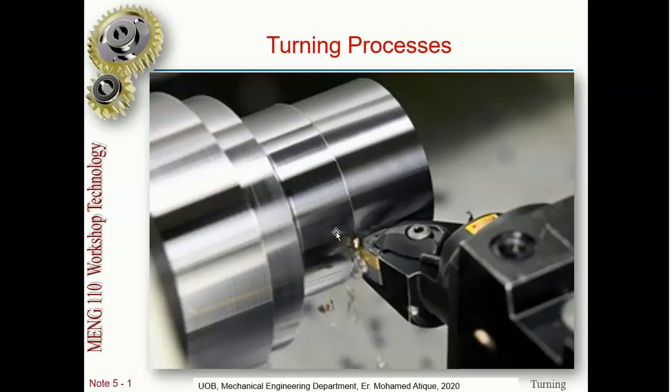Now what is turning? It is one of the basic manufacturing processes of metal cutting. It is removal of metal from the outer diameter of a rotating cylindrical workpiece, meaning we are reducing the diameter to obtain the required dimension. So turning is used to reduce the diameter up to a specified dimension, and to produce a smooth finish on the metal.

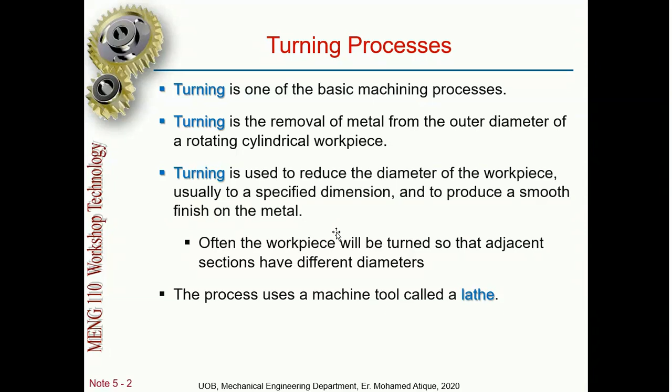Often we require different diameters, so the workpiece will be turned so that at different places we can have different diameters, and the operation is carried out on a machine called a lathe machine. This is an image of a lathe machine, also called a center lathe machine.

The main parts to be noted are: first, this is the headstock, the top of the machine. Then at the end of the machine there is the tailstock. Inside this tailstock there is a drill chuck.

Inside this tailstock we can put a chuck or dead center as per requirement. This is used to support long workpieces during the turning operation. If the workpiece is long, during turning it can buckle and we will not get proper finish. So to hold the workpiece from both sides, we use this tailstock.

Then there is the chuck, mounted on the spindle. This chuck is used to hold the workpiece. The workpiece will be held between this chuck.

Now to hold the workpiece we have the chuck, but to hold the tool we have the tool post. The tool post is used to hold the tool. So to hold the workpiece we have the chuck, and to hold the tool we have the tool post.

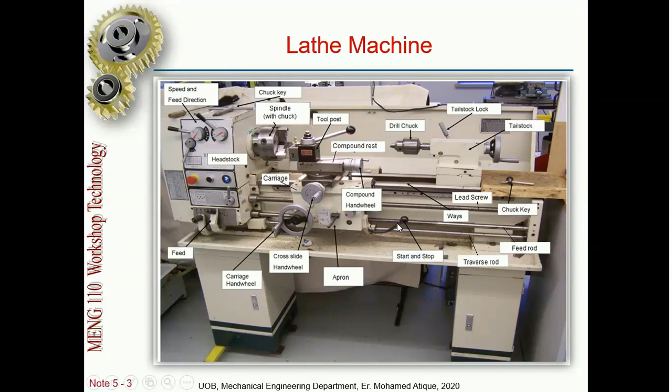So one by one we will see each component. This is the headstock, this complete part. Now H2 and H3 are the speed change mechanism; depending on the requirement, we select the speed.

This H4 is the spindle on which the chuck is mounted. It is mounted on this spindle, and also has a hole to accept a long work or bar stock. If the workpiece is very long, it can rest inside the spindle. And this H10 part is used to change gears.

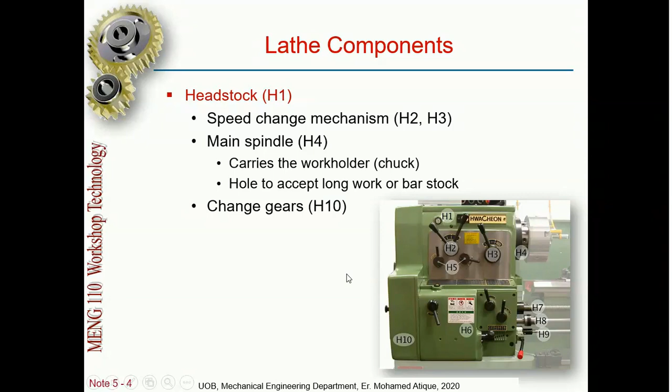Then the tailstock. This is the tailstock. In the tailstock there is a spindle, and on this spindle we can put different arrangements - we can put a drill chuck, a dead center, or other tooling.

Now this part is the bed for the lathe. The lower part of this tailstock, its casting, fits inside the bed so that it can slide longitudinally. Whatever position we want, we can lock it at that position with this lock so that it does not move from the desired position.

So this is the bed, the foundation of the lathe on which everything is mounted. Headstock, tailstock, and carriage, everything is mounted on the bed. This is the work area.

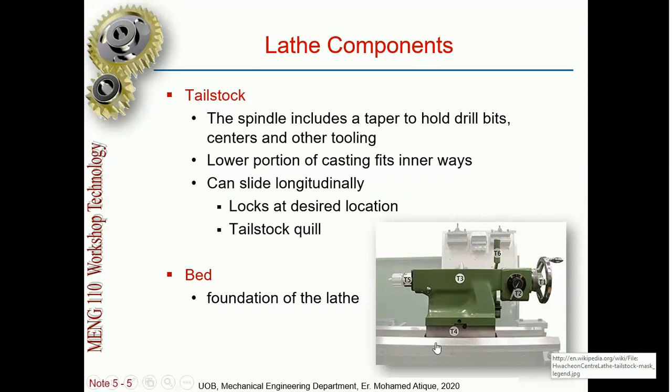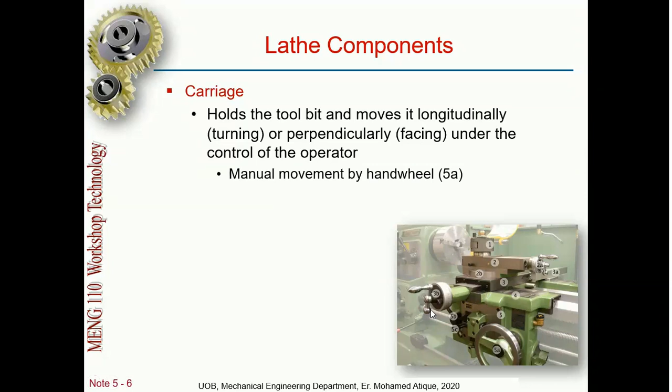Then this complete part is the carriage. It holds a tool bit and moves longitudinally or perpendicularly under the control of the operator. To move longitudinally, we will use this hand wheel. To move perpendicularly, we will use this cross slide. So manual movement is by hand wheel, and there is also one switch. If we don't want manual movement, if we turn on this switch, it will move automatically in the longitudinal direction.

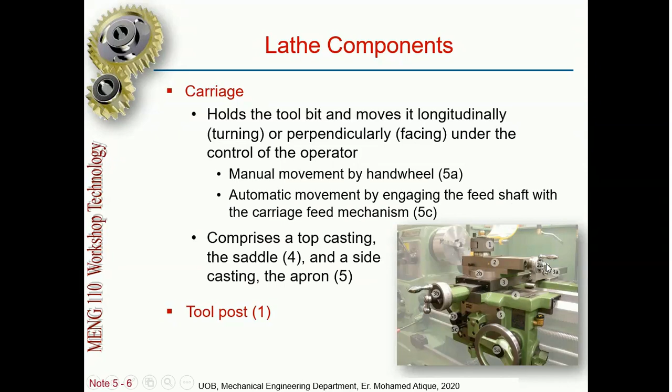So what does it comprise? A top casting. See, above the carriage there is a casting on which the compound rest rests. Okay. Top casting, saddle, side casting, and the apron. This part is called the apron. Tool post. See here, number 1 is the tool post. This is the tool post which holds the tool. So the tool bit is mounted in the tool post.

Cross slide. This is the cross slide. This is used to move perpendicular to the axis. Okay. So when we are doing facing operation, we will be using the cross slide. For turning operation, we'll be using the carriage hand wheel, but for facing operation, we'll be using the cross slide, and also for cut off operation.

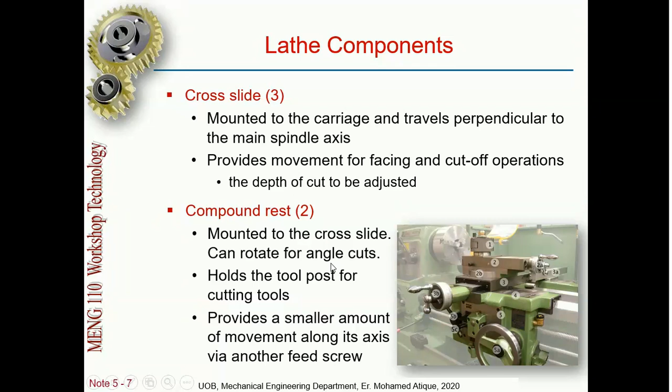Compound rest. Now this compound rest part is above the carriage. Above the compound rest, there is the tool post. So what does the compound rest do? It holds the tool post for the cutting tool. Okay, and also it can allow movement in different directions other than longitudinal and perpendicular. See, it's mounted to the cross slide and can rotate for angle cut. If you want to cut at any angle, we will use this compound rest and compound wheel.

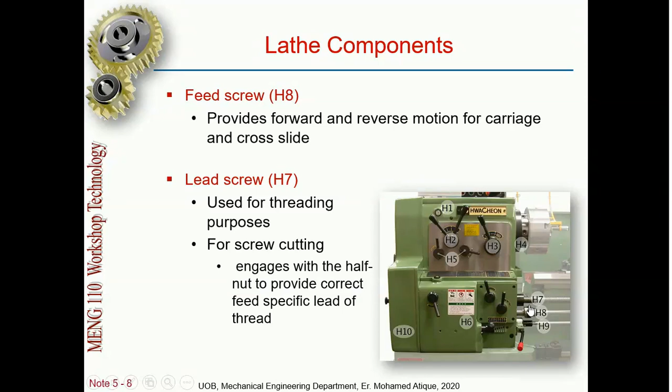Then there is this feed screw. This provides the forward and reverse motion depending on the direction. And there is also the lead screw. If you want to move at higher speed, we will use the feed screw. If you want to move at very small speed, we will use the lead screw. In threading, we need to work at very low speed, so we can use this screw for screw cutting. It does not engage with the nut completely. It only engages the half nut, to provide smaller speed.

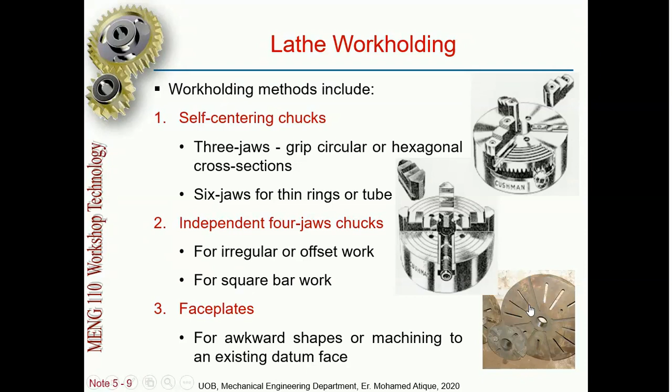Now how to hold the work in the lathe. There are different work holding tools. First is the chuck, the self-centering chuck. It has 3 jaws. Okay. Whenever our workpiece has a circular or hexagonal cross section, we can use this chuck. It automatically centers the workpiece. Now if the workpiece is very thin, we can also use a 6 jaw. Normally we use 3 jaw, but if the workpiece is thin, we can also use a 6 jaw. All these are self-centering chucks.

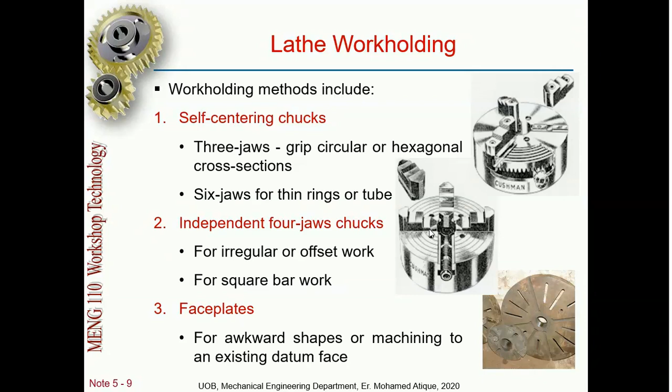Then there is the independent or 4 jaw chuck. It has 4 jaws, 1, 2, 3, 4. If the workpiece is not concentric, circular or hexagonal, if the shape is irregular, we will use the independent 4 jaw chuck, for a square workpiece or any irregular workpiece. Now if the workpiece does not have any shape, or we need to machine from a proper reference, we can use this face plate.

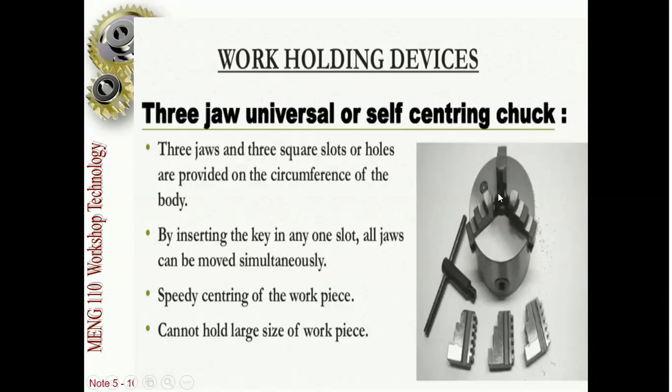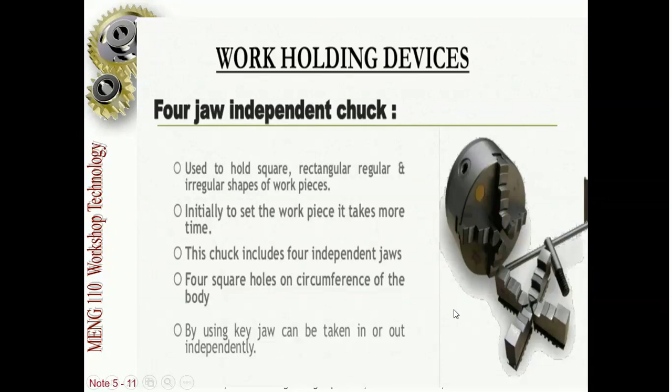Then there is the 4 jaw, which holds square, rectangular and irregular shapes. Initially, setting the workpiece takes time, because we need to set it according to the shape. It includes 4 independent jaws. Independent because the jaws are not dependent on each other. In 3 jaw, if you close one, all 3 will close, but here if you close one, only one will close. So each jaw we have to close separately with the key, not together.

Then this is how the faceplate looks. It's a flat round plate that threads to the headstock spindle. We can fix it on the spindle. So when the workpiece is irregular and cannot be held by a chuck, because the 3 jaw chuck can only hold circular workpieces, if the shape is not regular, we will use a face plate. Using these slots, we can hold any workpiece. The workpiece will be fixed on the slots, and we can use any slot we need.

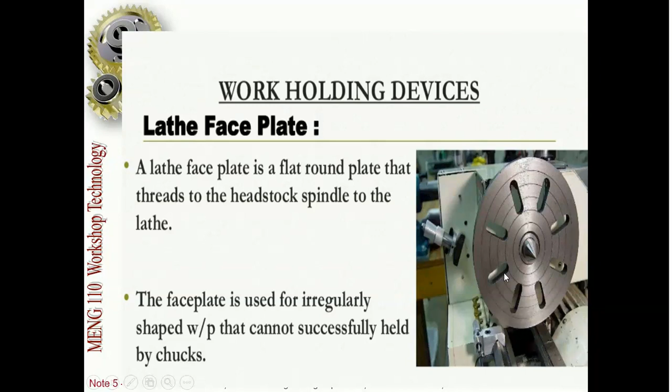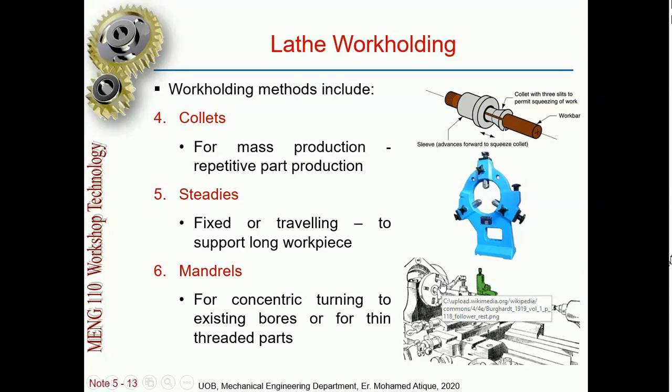See, this is collet. So this is the slot. So we'll put the workpiece inside this slot. Outer portion is tapered, which can go inside. So the outer portion of the collet is tapered, so different workpieces can be put inside.

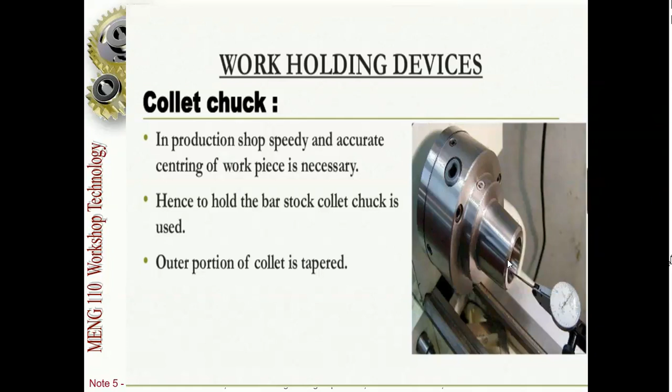So this is steady. So the down part will rest on the bed, and depending on the size, we can tighten it at the required place. It is clamped on the lathe bed from here, and 3 jaws are there. So depending on the size, we can clamp it at different places. So all jaws can radially move with independent screws.

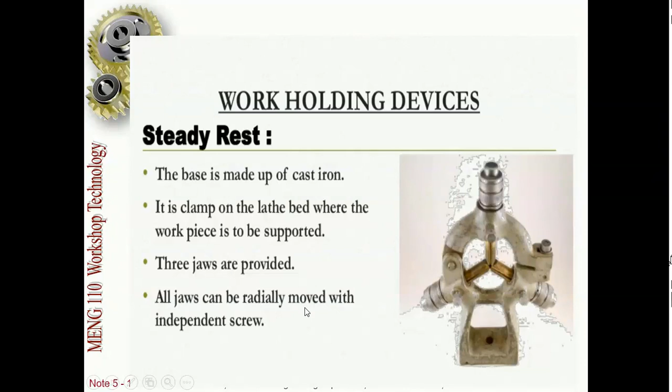And this is mandrel. See, this is the workpiece. Okay, so mandrel will be put inside the workpiece for hollow parts. This is for tapered surface. This mandrel is tapered. This is straight mandrel. Then there is cone shape mandrel. Okay, so solid mandrel, gang mandrel. If more than one workpiece, say three workpieces are there, we can use this type of mandrel, and cone mandrel.

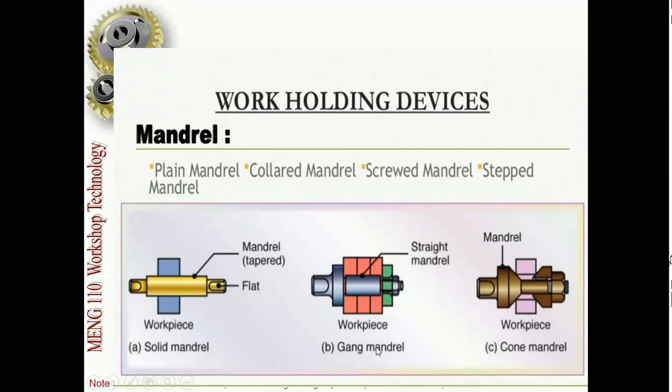So these are the different work holding devices. Then there are some more: spigots and centers. Okay, so this you can see is spigot. So like faceplate also, we can fix it at different places. We can use different slots to arrange it properly. Then there is center.

Now if we want to turn the complete length, if we put some length inside the chuck, that part will not be able to be machined. So if we want to do machining for the complete length, then we can use center, live or dead. Live center will be put inside the chuck. Dead center will be put inside the tailstock. So this is for accurate concentric turning of several diameters or for taper turning.

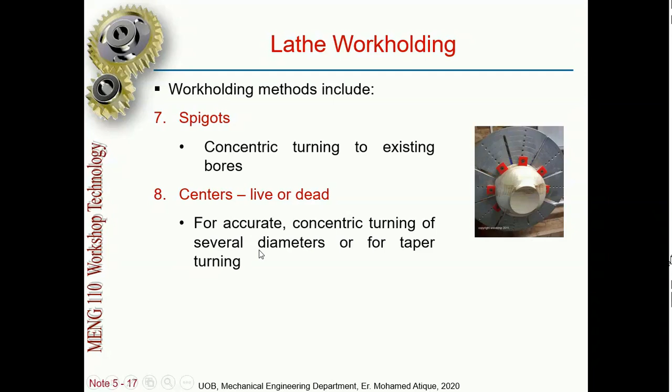So these are the live and dead. Okay, this we can put in the tailstock, and this we can put inside the chuck. So this is live, this is dead. So work to be turned between centers must be center drilled. So for this the workpiece should have a hole at both ends so that it can rest on the center. Okay, so during cutting it provides a support.

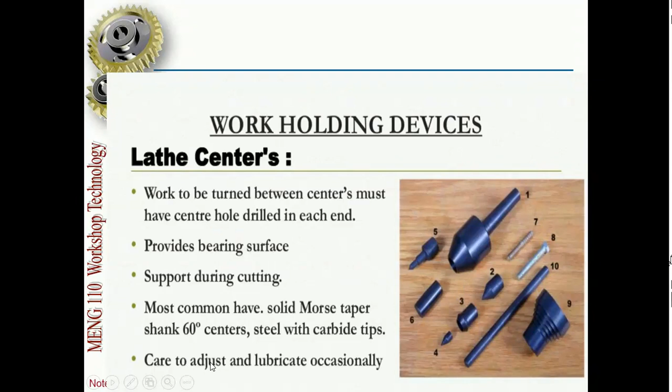So most common we have solid Morse taper 60-degree shank and steel with carbide tip. Okay, so here we can adjust and lubricate occasionally. So these are the different work holding tools.

Now whenever we cut the metal, what are the variables involved? So always there is one cutting speed. Okay, at what speed the workpiece will rotate, that is the cutting speed. Defined as the speed at which work moves with respect to tool, measured in meters per minute. So in 1 minute, how much the tool is moving. Okay, so that is how we determine cutting speed.

And there is feed rate, distance the tool travels during one revolution. When the workpiece completes one revolution, during that period, how much distance does the tool travel? So it is measured in mm per minute or mm per revolution.

So our surface finish is mostly dependent on these two factors, because if the cutting speed is very less, then we will not be able to cut properly, and if the cutting speed is very high, then there is loss of power. So we should have an economical cutting speed which can provide good surface finish also, and we can save power also.

And also feed, if you are moving very fast, we will not get proper surface finish, and if you are moving very slow, it will result in wastage of time, because the machine will run for a longer time, and wastage of power. So a proper cutting speed and feed should be selected to get proper surface finish, and to save power and electricity also.

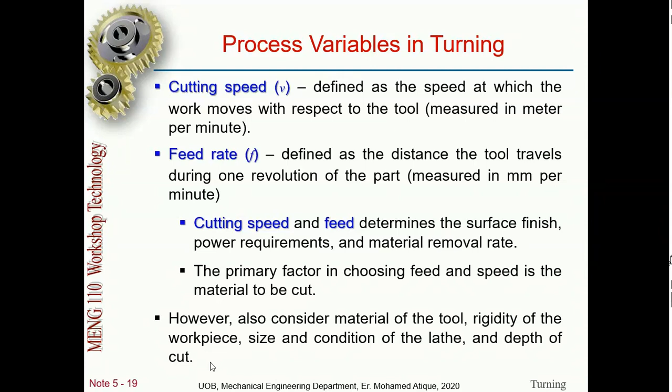However, there are other factors also which determine how much cutting speed and feed to select. The other factors are material of the tool. If the material is very hard, we need high cutting speed. If the material is soft, we can machine it at lower cutting speed. Rigidity, size and condition of the lathe, and also the depth of cut, how much depth we require. So depending on all these factors, we will decide the cutting speed and the feed.

To calculate the proper spindle speed, divide the desired cutting speed by the circumference. So how will you calculate at what speed the spindle should rotate? Divide the desired cutting speed, the standard cutting speed, by the circumference. So this will give you the spindle speed.

And the feed rate we can change. We can experiment with different feed rates, we can move fast, we can move slow, and see the quality of finish. So the feed rate at which we are getting proper finish will be the required one. Depth of cut is how much the cutter is inserting in the workpiece, the distance the cutter is fed into the workpiece.

Now this also depends on the lathe condition, material, hardness, speed, feed, amount of material. So depending on all this, we will select the depth of cut, because if the material is hard and we try to insert for a larger depth, it can damage the tool. And if the material is very soft, then also it can break the tool. So depending on material condition, everything, we will select the depth of cut.

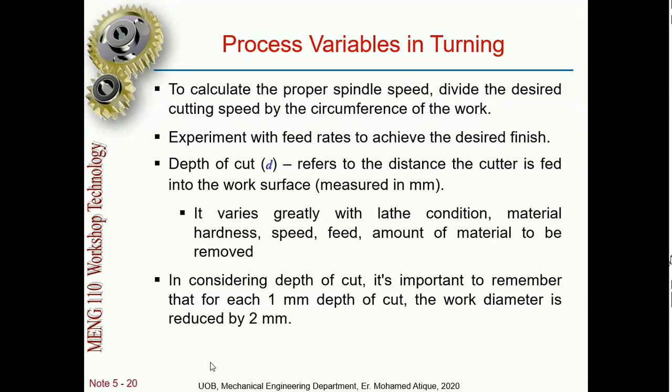Now we also need to remember that the cutting is happening on both the sides, not only on one side. So if you want to remove 1 mm, we must know that the workpiece will be reduced by 2 mm. So based on that, we should determine our depth. See, if we need to cut 1 mm of depth, it will also be removed from this side, so it will be 2 mm. So appropriate cut depth should be taken. This all should be kept in consideration.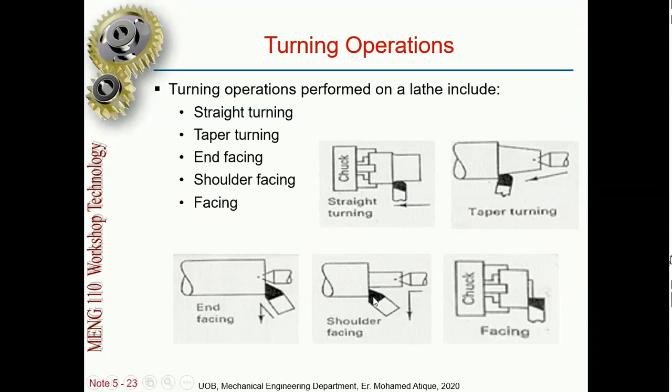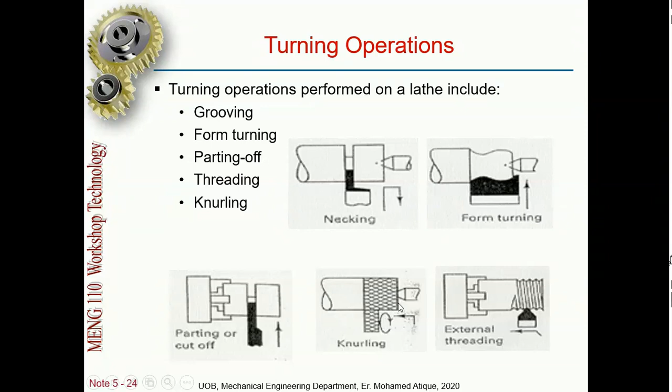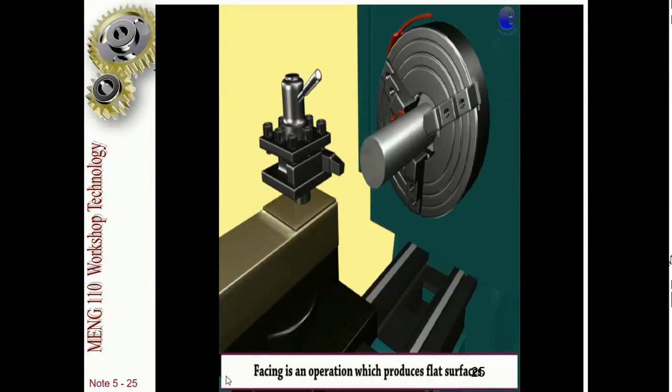Then threading, making thread on the workpiece, and knurling, imprinting the impression on the workpiece. So all these operations can also be done on the lathe machine. We can see a video of how different operations are carried out. So this is the facing operation, facing at the end of the workpiece. Facing is an operation which produces a flat surface. Facing is used to reduce the length, whereas turning is used to reduce the diameter.

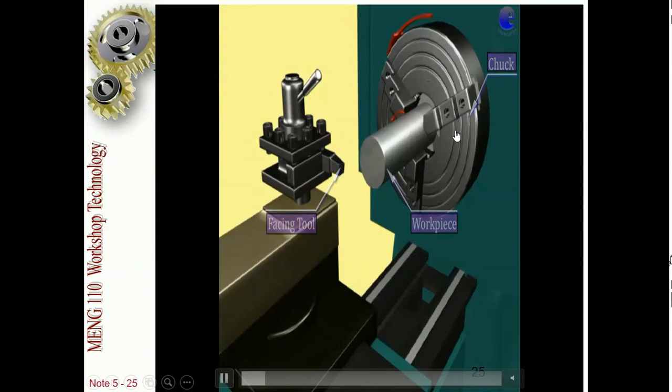So this is a chuck, 1, 2, 3, a 3-jaw chuck. We'll put the workpiece inside the chuck. This is the tool post, this is the tool. With the help of the cross slide, we'll have perpendicular movement and the facing operation will be done. This is the cutting motion, this is the depth motion, this is the tool post.

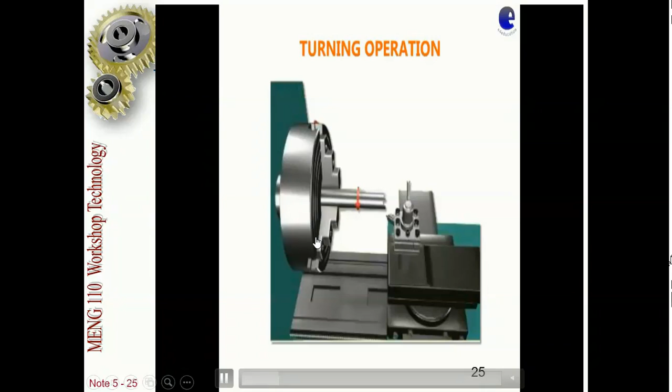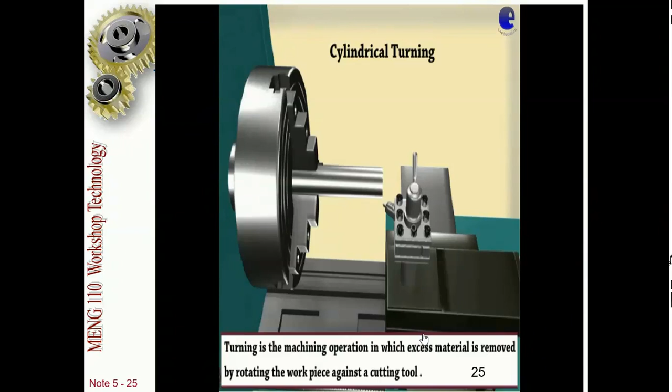Now have a look at the turning operation. Chuck, workpiece, tool, tool post. The tool post is resting on the compound rest, which is resting on the carriage. In turning, we are reducing the diameter. For the movement in turning, we'll use the carriage hand wheel because we need horizontal movement. For facing, we need perpendicular movement, so we will use the cross slide.

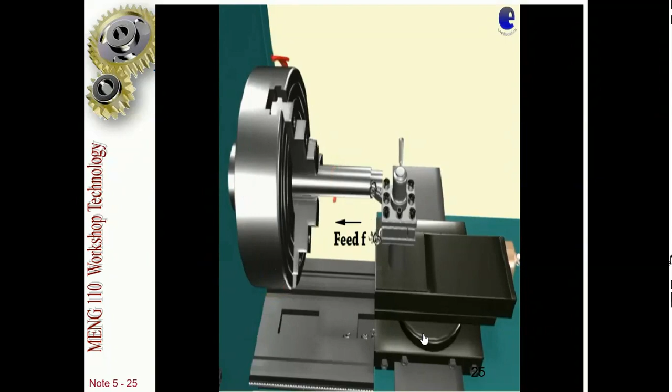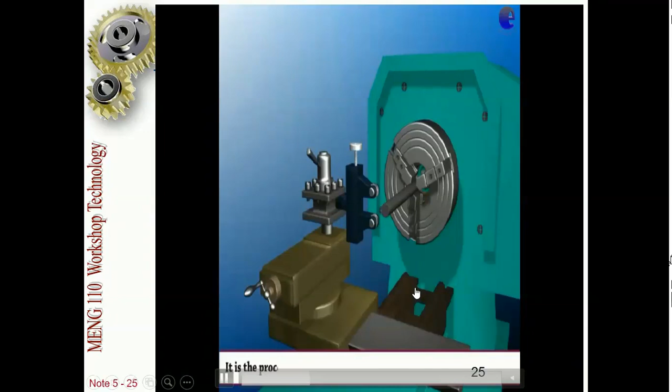See, now the feed will move in the feed direction horizontally. This movement will be achieved with the help of the carriage hand wheel. Then knurling. This is the knurling tool. We will just imprint this impression on the workpiece.

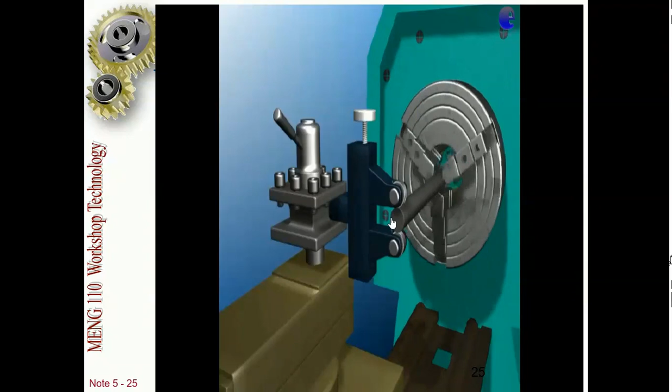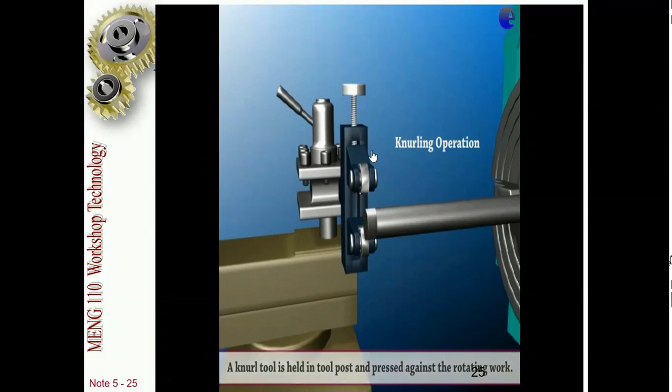So we fix the workpiece between the knurling tool and start the machine. So whatever impression is there, that will be knurled on the workpiece. See, the workpiece has also taken the impression of the knurling tool. This is knurling operation. This is used to provide grip. If we need a grip on the workpiece, we do it by knurling operation.

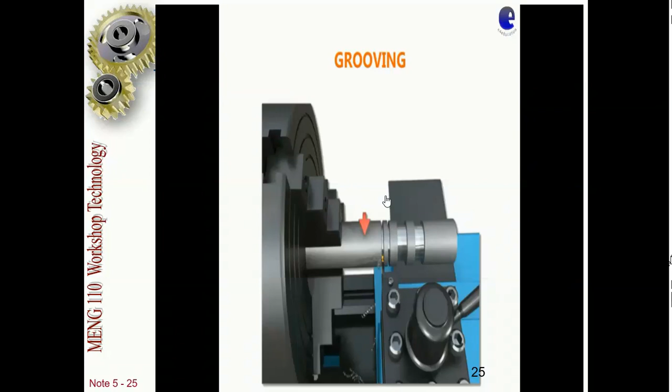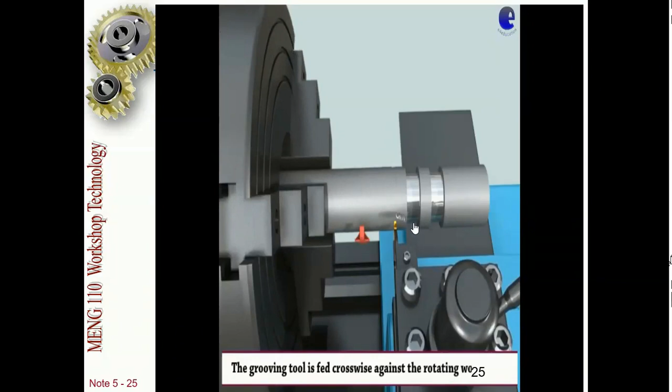Grooving, making a slot between the workpiece, this type of slot. See, just making a slot in the necking. We can also call this as necking. We can have a square, round, any shape. Okay, so to have this type of groove, we'll use a grooving tool. When we need to fit a ring in the workpiece, then we use the grooving tool.

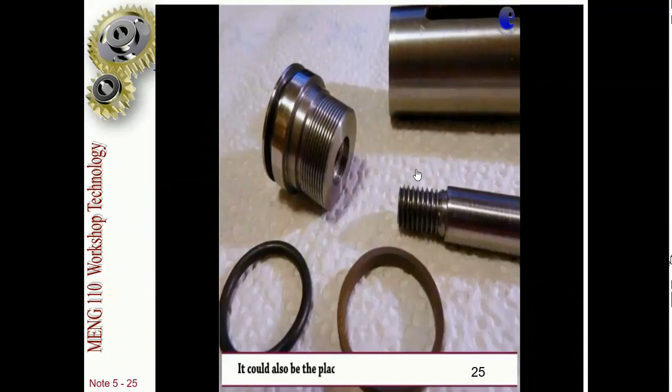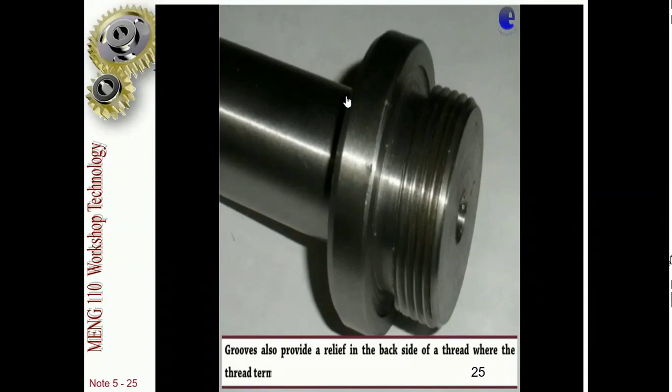Okay, so all this is obtained with the help of grooving tool. See this groove inside. But after the thread, there is a groove. So this all is obtained by grooving tool.

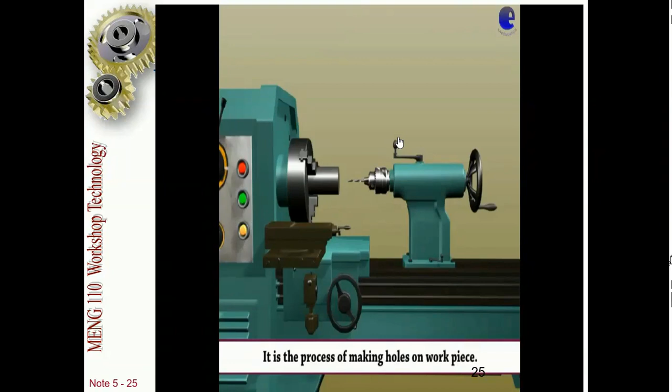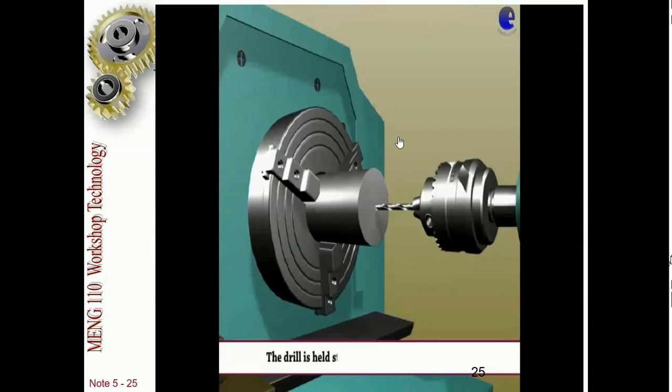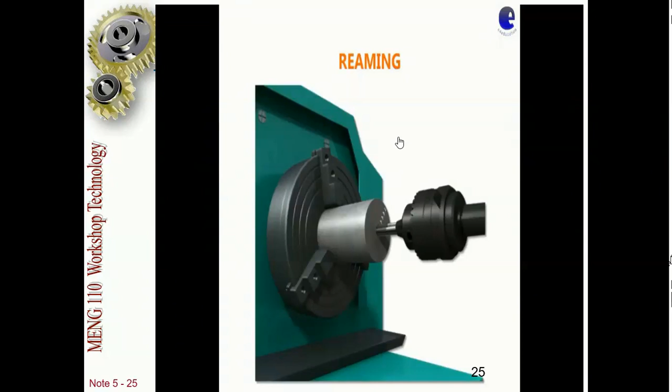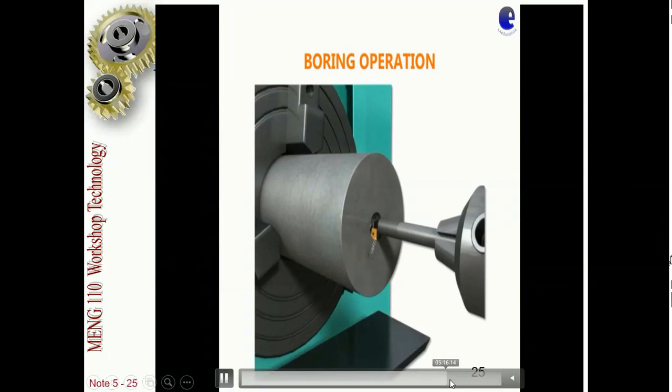This is center drilling operation. So it will automatically drill at the center of the workpiece. So in the tailstock, we'll put a drill chuck with a drill. Reaming operation, same. Instead of drill, we can use a reaming tool. So all the drilling operations also we can perform in lathe machine.

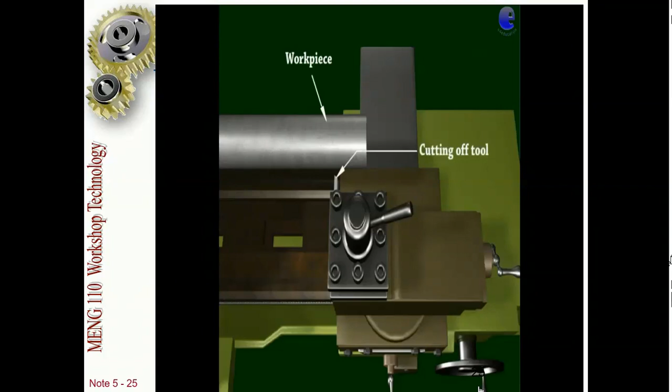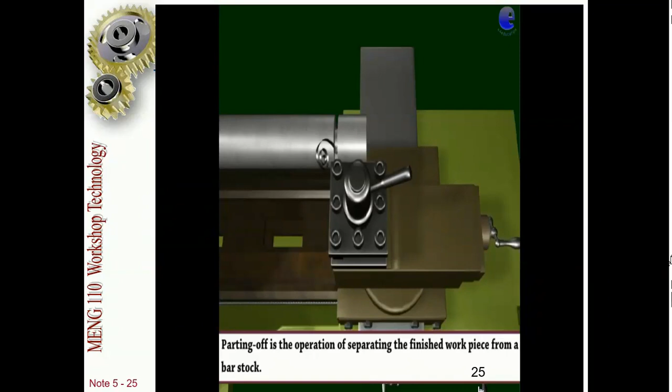Parting off, see, separating a workpiece. We'll cut it from the middle and separate the workpiece. Okay, we have cut some part and separated it. So this is parting off.

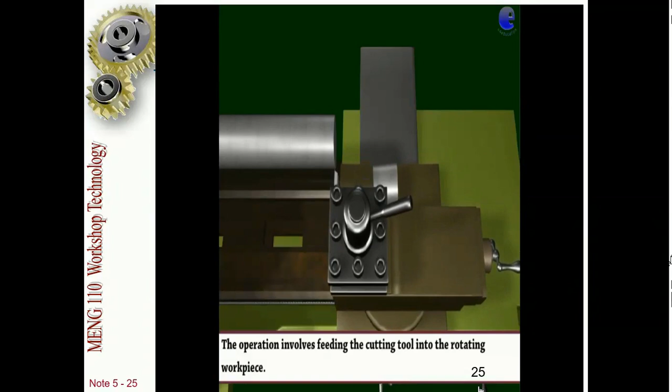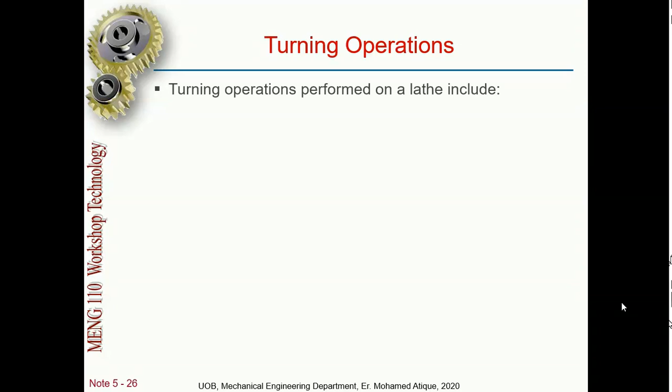So these are the different operations which we can perform on lathe machine. Drilling, reaming, boring, taper boring, internal thread also we can make, internal forming.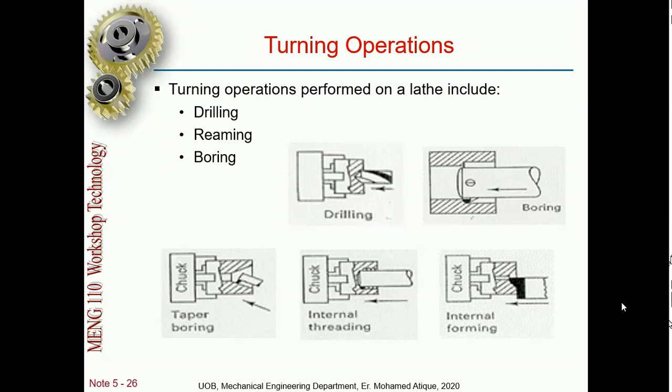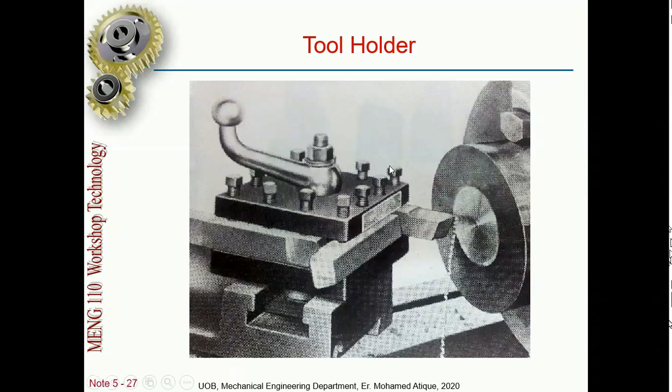So see, this is how a tool holder looks like. Normally we use single point cutting tool for cutting, but we can use different tools also. Like for knurling, we will use a different tool. So depending on the requirement, we can use different tools. Normally we use single point cutting tool. This tool will be fixed in the tool holder.

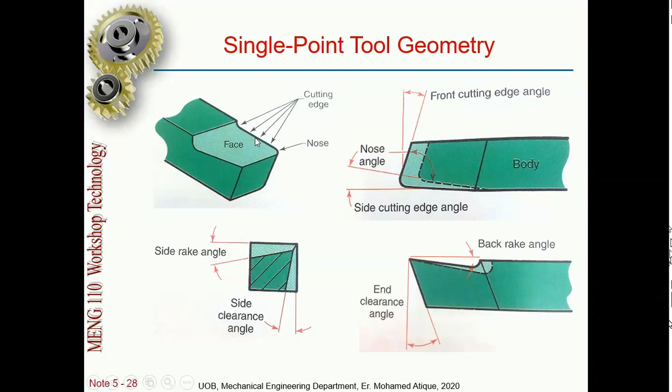So this is the front cutting edge, and this is the side cutting edge, and these two cutting edges are joined with the help of nose. This is the front, this is the side, and these two are joined with nose. These two edges are separated by a tool point, which is known as nose angle.

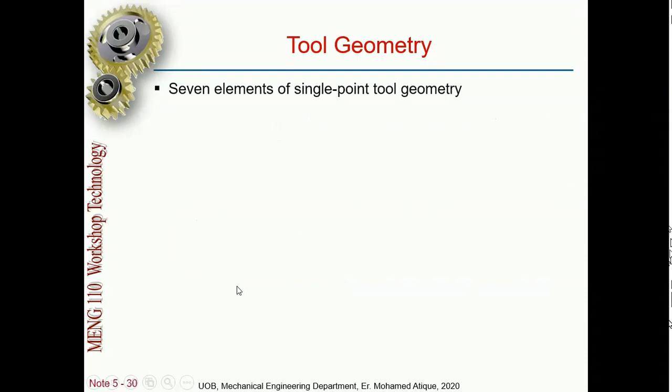Now, side cutting edge angle. See, this angle will determine the entry of the tool. Okay, the more sharp, the more easy. The greater the angle, the less will be the sharpness, and it will take a little more power. So this side cutting angle determines the entry of the tool in the workpiece. It is also used so that if the angle is very less, all the load will come on the point. So it can also be used to reduce the sudden force when it enters, because the force will be distributed along the edge.

Now, front cutting edge angle. This provides a clearance between the edge of the tool and the workpiece, because if that angle is not there, then the complete edge of the tool will collide with the workpiece, hence spoiling the finish. So there should be some clearance, so that after you have machined, the edge should not collide with the workpiece, hence reducing the rubbing and friction. If they are colliding, it will produce friction, spoil the finish, require more power and more energy, and heat will be generated. So to reduce the friction, we'll provide a little clearance so that the edge should not rub with the workpiece.

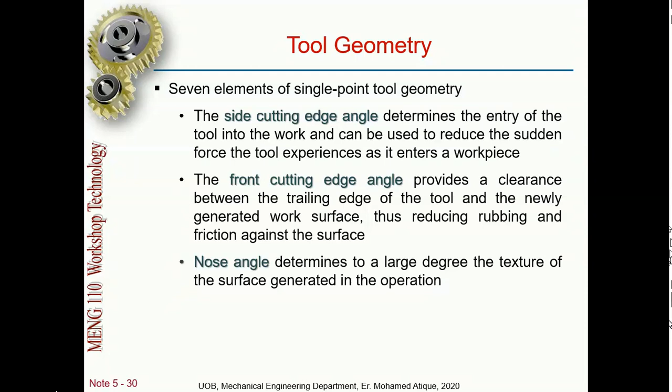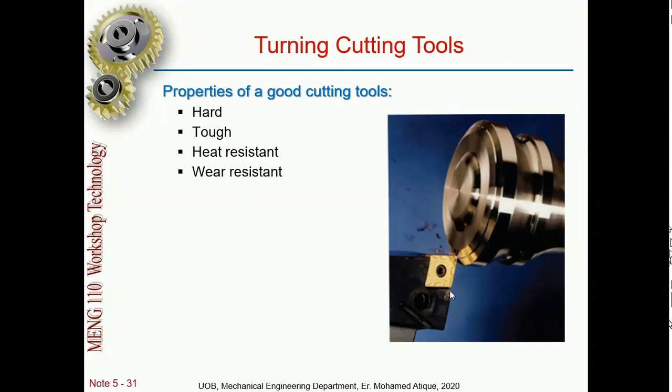So what are the properties of a good cutting tool? It should be hard because it has to penetrate into the workpiece. So it should be hard and tough. It should be heat resistant because during cutting too much heat is generated. If the tool is not heat resistant, the tool will melt. So it should be heat resistant so that it does not melt easily. Wear resistant: it should be hard and tough so that it can undergo operation for a longer period of time. It should not wear out easily.

So what are the cutting tool materials used? HSS, high speed steel, then carbide. We can use carbide fixtures, cemented carbide, ceramics, polycrystalline compacts. So all these materials we can use for cutting. Cubic boron nitride, diamond. Now diamond is the hardest of the materials.

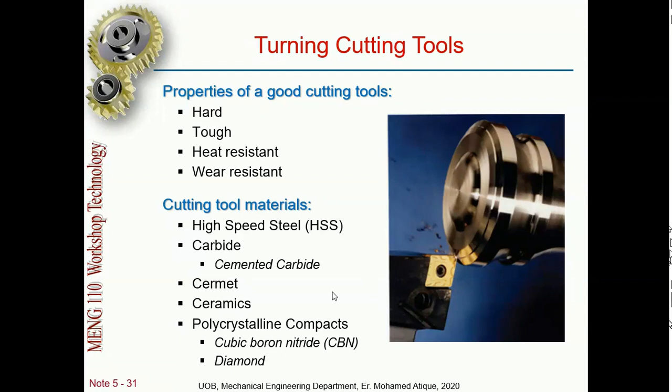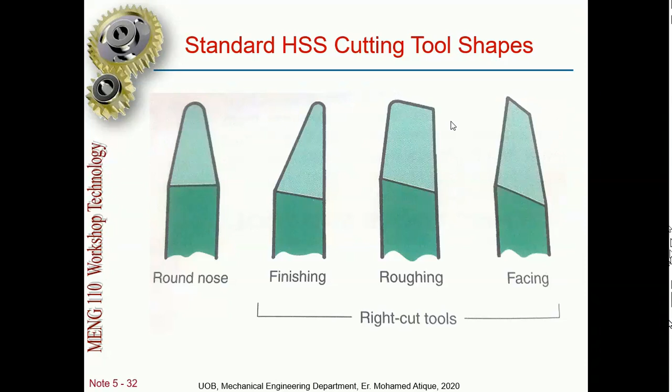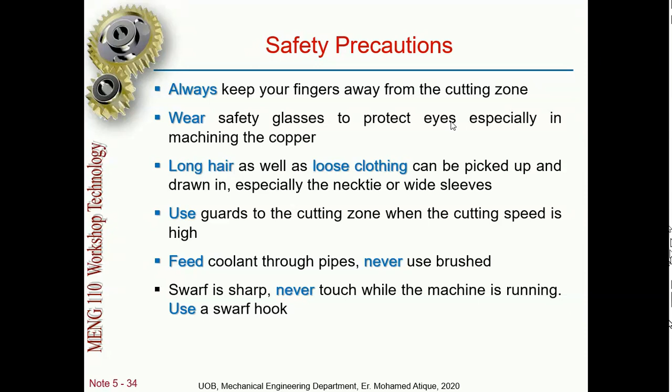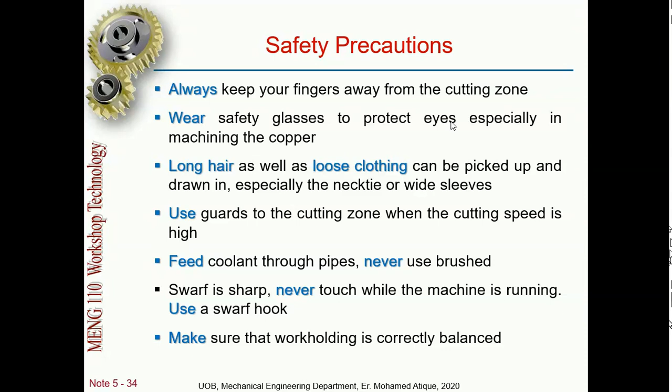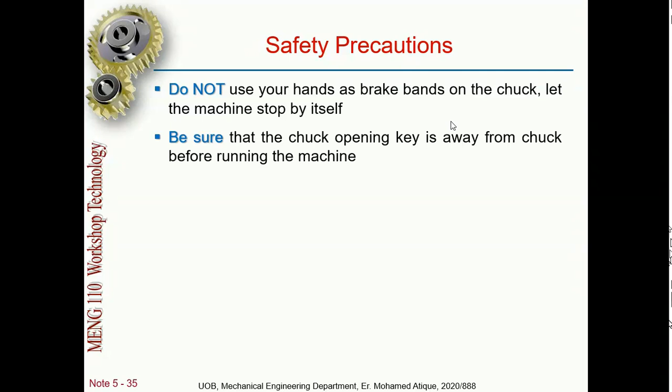Now, if possible, keep the guard before the chuck. Always use a guard when the cutting speed is high. In processes where large heat is involved, try to use coolant or lubricant. And never touch the cutting tool or the workpiece with your hand. Whenever you need to do anything while the machine is working, first stop the machine, then do the required task. And make sure that the work is properly balanced and properly tied. If it is not tied, it can come out. And do not use your hand to apply the brake. Let the machine stop by itself. And make sure the key is always kept away before running the machine.

Set the tool on the workpiece center so that you can get a proper finish, to prevent the workpiece from climbing on the tool or cutting above the center. So make sure that the tool is properly aligned at the center. It should not be up or down, to get a proper finish. And make sure that the cutting tool and work holding are securely attached to the machine. Everything should be tight, nothing should be loose.